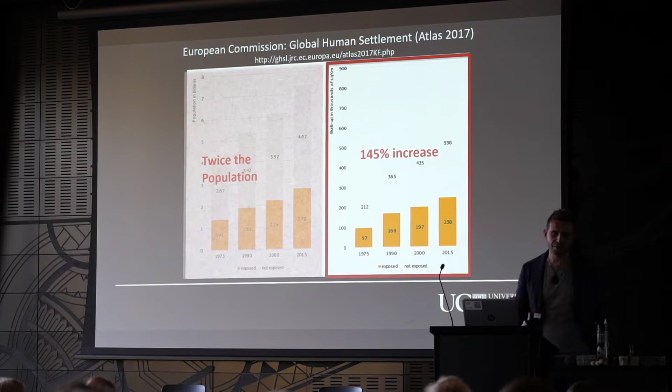Then if we think about the built environment, which goes together with people, same thing — people keep building buildings and bridges in earthquake-prone countries. So in reality, if we like where we live, we think that we cope with earthquakes. We think they may happen, and we don't care. That is really the fact.

But the other important aspect is this: if we think about how the population is actually migrating, nowadays people want to live in mega cities because there are more professional opportunities. And what happened is that now the requirement from society is to build fast. So you can't build a bridge and expect to disrupt several state highways because it's costing billions and billions. Example: Auckland Harbour Bridge. We know what's going on, and this is an example of not sustainable traffic management.

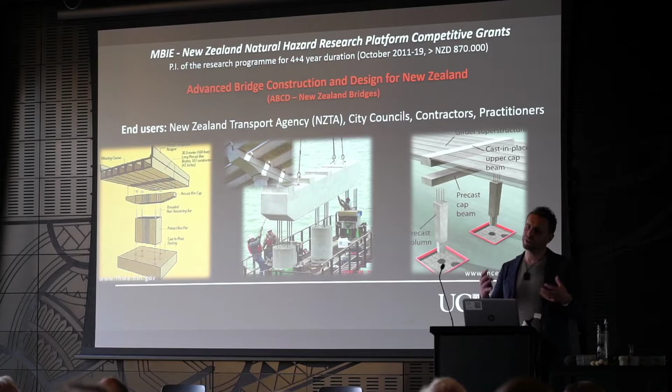So the idea is that what I've been working on the last 10 years is actually working on solutions which are fast to construct, but also resilient. This is a project that's been funded by MBIE, and the idea is that you build up concrete elements—I've done it in buildings more with timber elements. They're all prefabricated and connected together with different reinforcing. In a way, you can build everything very fast, a bridge or a building, and it looks like a big Lego system, where you put everything together.

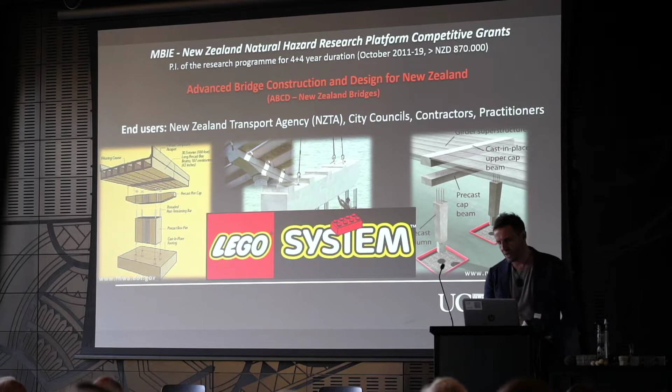Usually when you see something like that, in the thinking of earthquake engineers 20, 30 years ago, oh, you have a Lego system, it's very dangerous. Stay away from a Lego system if you have earthquakes. And what I'm going to do is prove that's actually wrong.

So what I want to do is talk a little bit about the introduction, what we learned from the earthquakes as Geoff was alluding to before, and then I will show some examples of devices that were developed, then we'll talk about the connection and look at the system—the structure. In this case it will be a bridge structure. So: introduction and steel devices.

First of all, when we talk about this—we pretty much live it on our skin—the first question is why we need to change the way we've been designing, why we need structures which are seismic damage resistant. It's a clear example: you've seen what has been happening in Christchurch, the disruption that we had. We need to do something different.

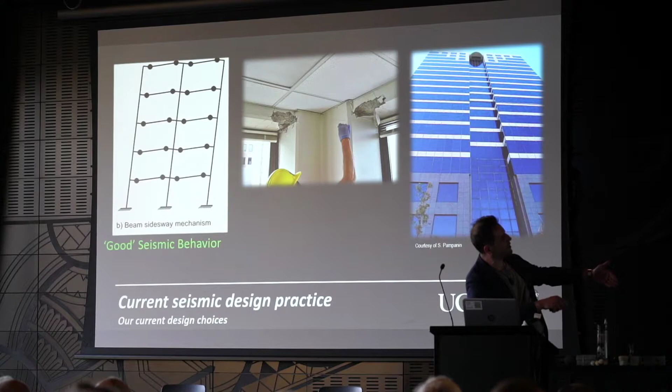If we think about what happened in Christchurch, all those buildings were designed very well, because they're all designed to fail in those parts. Imagine this is the cross-section of a building—these are the beams, these are the columns—they're all designed to damage in a way that dissipates the energy. The concept is the damage in the member is a way to absorb the energy of the earthquake. Obviously, if you look at it from a life safety perspective, fine.

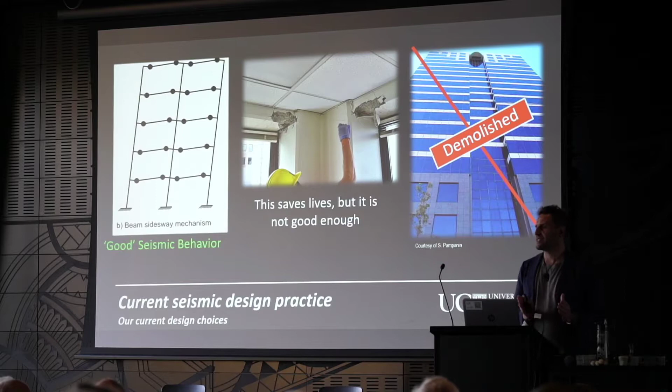But basically, as a result of that, most of those buildings couldn't be fixed. They were too expensive to fix. It was easier to demolish and build something new. And so this is not really sustainable—if we talk about sustainability, this is not sustainable. Imagine all the environmental consequences that we had to basically demolish a city. Where does the waste go, for example—where has it gone?

So I think we need to start changing the way of thinking.

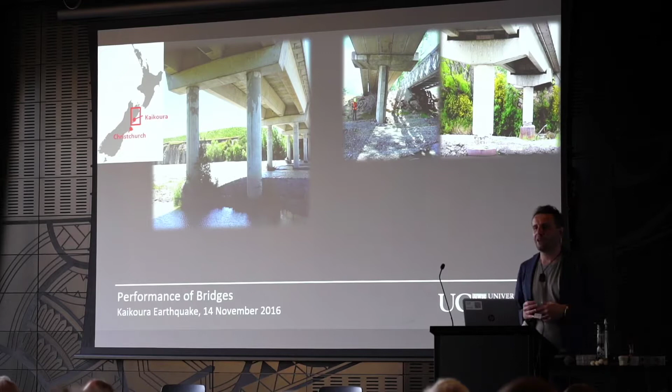Infrastructure was interesting because with the Kaikoura earthquake in 2016, although we haven't got major collapses of bridges, we had a similar performance. Most of those bridges in the Kaikoura area had extensive damage in the columns. The columns are the ones taking the seismic forces—they are the legs. Imagine myself, I'm the bridge: the upper part is basically the mass, the legs are the ones taking all this wind coming from the earthquake. So in the same concept, the columns damage, and the damage absorbs the energy of the earthquake.

But the interesting thing is, this is the new design and this is the old design—the same. So the progress that we've had in the last 40 years has been very minimal, if you compare it with IT or what we've been facing, right? And so that obviously tells me, hey, we need to wake up a little bit, because the way we are designing structures probably should be changed.

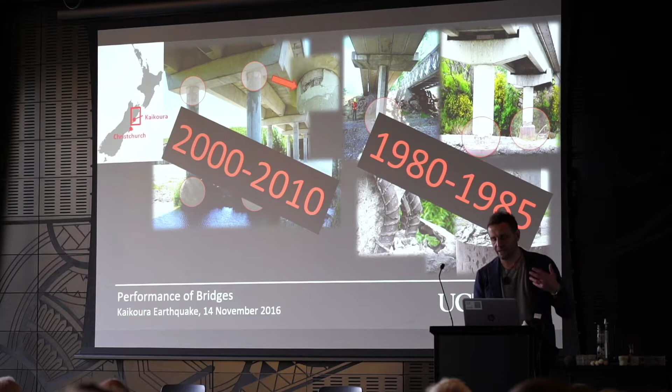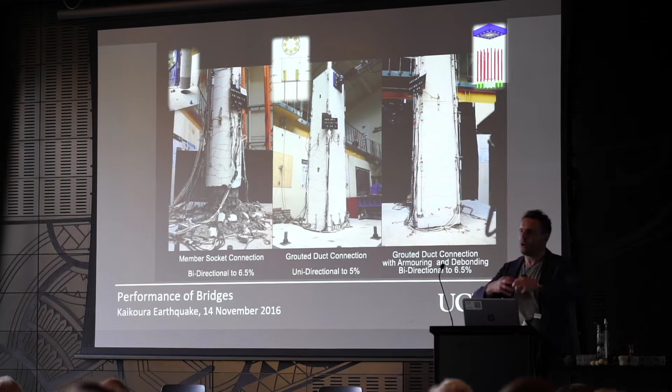And this is an example of columns that have been tested a few years ago. Imagine that this is the earthquake—imagine you could actually be under a bridge, maybe it's not nice, and you have an earthquake, and you see the columns going back and forth, and the intensity keeps increasing. As an outcome, you will see the concrete spalling, the bars will start yielding, going into a plastic domain—and that's what you want, because you want that reinforcing to dissipate the energy.

But then, obviously, if you have something like that, you have also the danger that those columns can have residual displacement and start leaning on one side, like the Pisa Tower - I'm Italian, so I need to sell it, right? But we don't want that, because that is very difficult to fix.

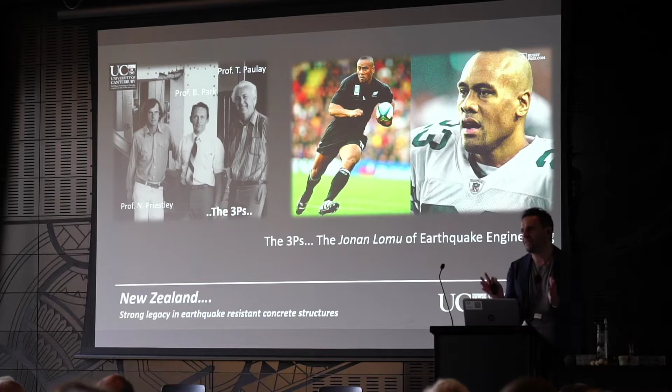So, although we had all this mess, we have been always pioneering earthquake engineering, and these are the 3 Ps: Professor Priestley, Professor Park, Professor Paulay. To me, they are the Jonah Lomu of earthquake engineering, for sure. But the target was always the life safety, and that was the main target. I think they did a pretty decent job on that.

But the thing now we have to start asking is, if we have a structure which is damaged, what is the residual performance? Can the structure take further earthquakes, or do we need to repair it? If we have to repair it, how long will it take, and how extensive will be the repair?

And obviously all those questions, these 3 main questions, are related with business, are related with the functionality. So now we are thinking, if we can guarantee the life safety, we need to be able to design those structures to maintain the functionality, because you don't want to have business disruption.

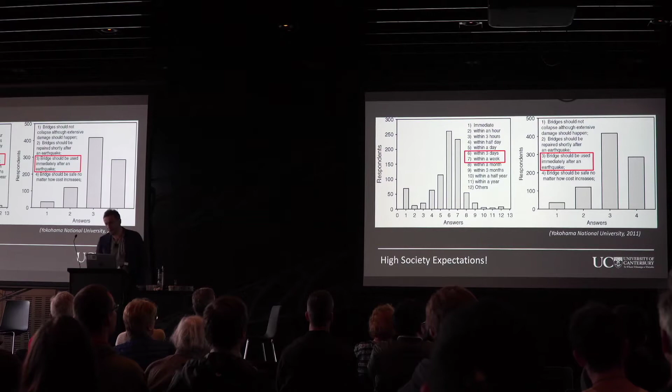This is an interesting survey from Yokohama National University in Japan, where for bridges, the society had very high expectations. They expect that a bridge should be immediately open after an earthquake, and if something needs to be done, it has to be within 1 week, because it's a public structure. Imagine if you have a bridge collapsing, it gives like a sign of vulnerability for the entire network.

I'm selling bridges because I do research on bridges, of course. So bridges are very important.

But now, what do we do? Shall we call our superhero and say, hey, we need to turn all this mess into resilient bridges and structures? I think what we need to do is try to change the way we think, and try to accept the damage, but be able to repair it.

And so when everyone talks about resilience, the definition is simple, right? It's the ability to bounce back after an unexpected event, usually a bad event which affects our lives.

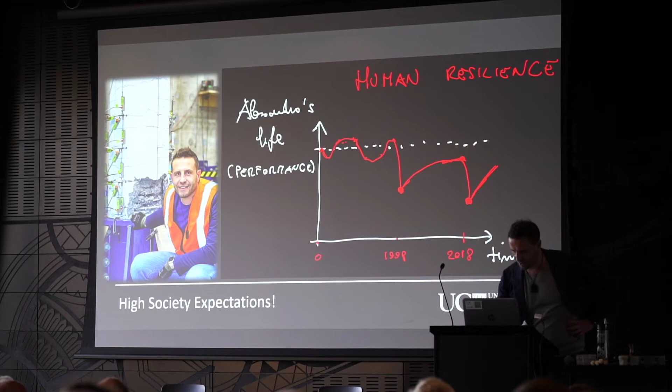We have our performance, which we can measure in terms of professional activities. Let's assume that we run always 100% for our 70, 80 years of life. But what happens when something bad happens to us, we have a loss or something, we drop. And then we say, how resilient is a person? We measure the ability of this person to come back and be functional again. This is my personal human resilience curve, which has been hit quite a lot in 2018 because I lost my mom.

So if we try to go into the engineering side, what we can see here, when we talk about resilience, we have 3 R's. Robustness, which is reduce the probability of failures in any component of the building. Then we have repairability, which is linked with the consequences from failure, so reduce those consequences. And then recovery, so the time - be able to recover very quickly.

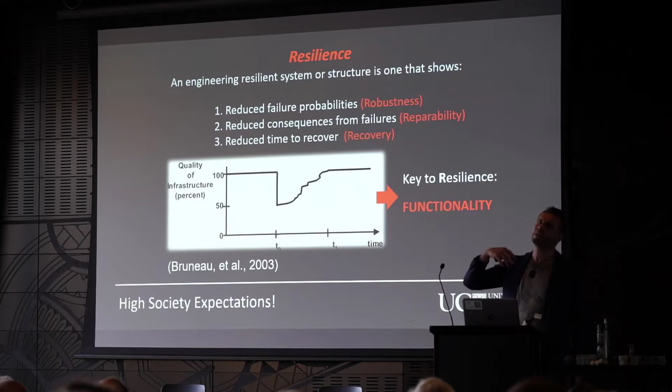So in a way, I like that we are doing this presentation connected with the 2 Geoffs, because the idea is that to increase this resilience curve - if you have an earthquake, a normal structure will be hit down, and then will take some time to go up, and this will be the recovery time to go up to 100%. In reality, if we develop new solutions which are controlling the damage, and then we know how to repair these structures, that curve will become far better.

But then Professor Geoff Chase is going to close up - if we add sensors in the structure, we will instantly be able to say, hey, that structure is fine. And I don't understand why we don't put sensors in our structures. We have an accelerometer in the iPhone, we have 200 sensors in a car. I can't understand why we can't think to have sensors embedded in our structures.

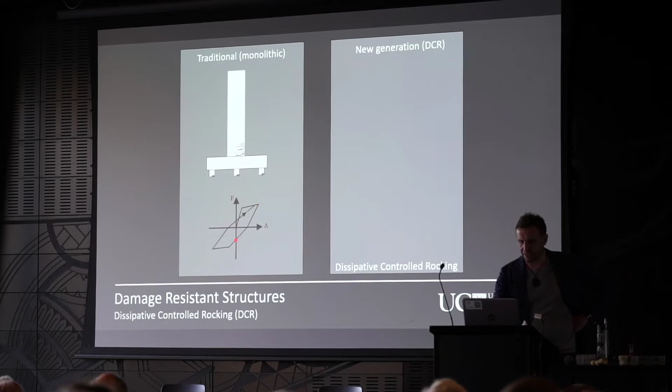The idea of developing these new solutions is that traditionally, imagine an earthquake, you've seen in the columns, you have damage in the member. With those new solutions, we basically don't have any damage in the column, and we have the connection designed in a way that they actually dissipate the energy.

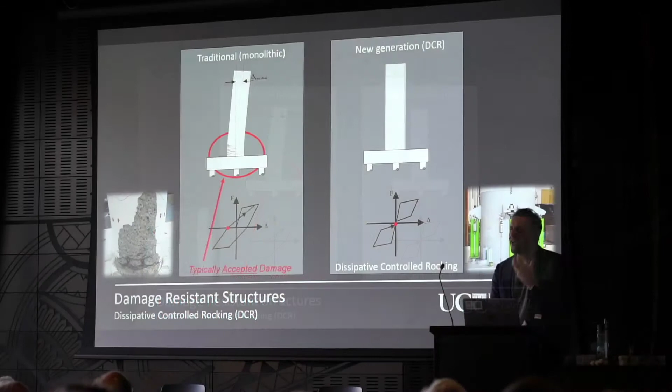What do we have inside to avoid the Pisa Tower effect? We have a rubber band. No, it's not really a rubber band, but high-strength steel, which keeps the structure up in place. If you lose the rubber band, you are in trouble. Boom. You don't want that, right?

So I can, where is Jess? Jess, you need to pass my toys around. So if you want to play with the rubber band, that's an option.

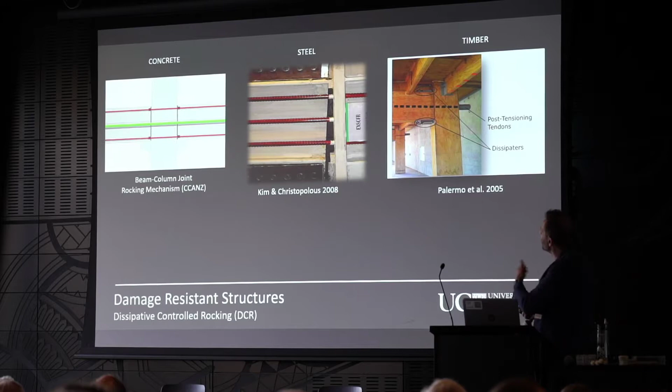The idea is amazing because this simple idea, where you put high-strength bars which recenter the structure, and fuses that dissipate the energy, can be applied to any structure - a building, a bridge - independent of the material. This is concrete, this is steel, and this is timber.

Again, imagine those rubber bands placed, in this case, within the columns, within the beams, and running through. So when you design those elements, those connections, what is important is to control the strain in the materials.

But we can do this very easily, then minimize the potential residual deformation. We don't want to have a Pisa Tower, and we have the rubber bands. And then make sure that we can repair very easily.

So for example, and Jess is going to pass those 3D printed devices around, if these are placed externally, it will be pretty much easy, and knowing that we need 4 or 5, 10, 100, it will be easy to replace it because they're placed externally to the structure.

The key thing, especially for bridges, is making sure that those elements don't actually rust, so we've done research on that side too. Maybe, Jess, if you want to pass those devices, that would be good.

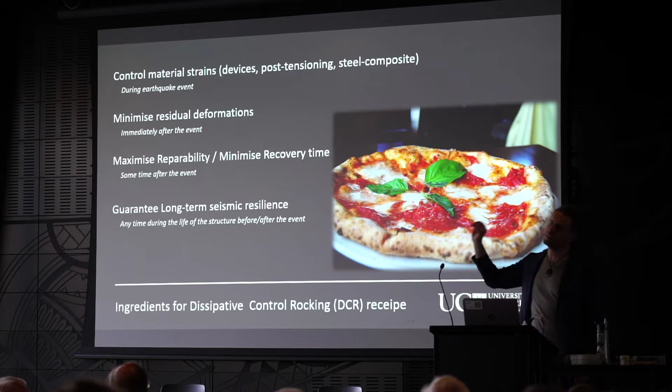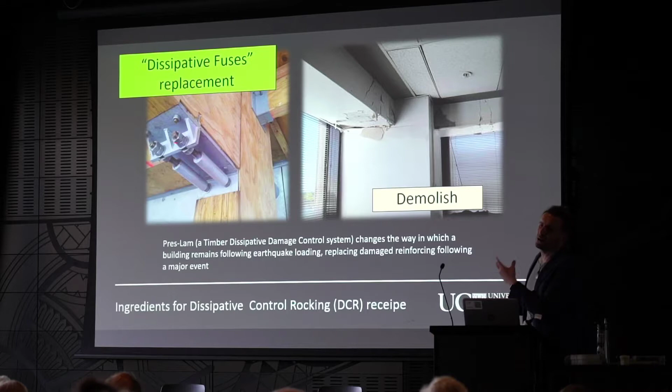Now, what you need to think about - this is an example called the timber Pres-Lam system. This is a beam-column joint, this is the Young Hunter House on Victoria Street, and this is the typical connection. After an earthquake, this is what you expect - you will be in a position to replace those devices if needed. These are the dissipative fuses.

I will just briefly talk about this device, and then Professor Geoff Rodgers is actually going through and spending a lot of time on that. But the idea is that these are simply pieces of steel, and they have a tube outside.

I think Jess has passed the samples around - these are 3D printed samples. The tube is just preventing them from buckling. So the idea is that when these devices go into compression, they don't buckle, okay?

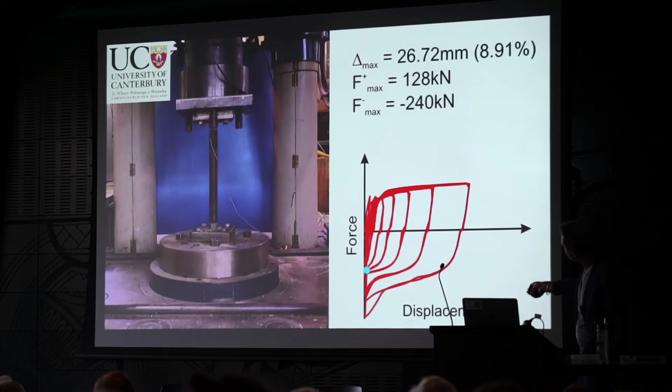The performance of those devices is done in a way that steel is actually elongating a lot, absorbing the energy of the earthquake. The idea is just pulling back and forth, simulating an earthquake. If you have a big area - this is force and this is displacement measured at the top - that means the device is quite capable of absorbing the energy coming from the earthquake.

The application has been extensive, not only on bridges - I'll show you a bridge example - but in timber and concrete buildings. If you're all from Christchurch, if you go to Victoria Street, you can start from Knox Church - you can't really see them, they're hidden at the bottom of the concrete columns. Or if you pretend to buy some expensive Italian furniture at Matisse, you can go inside and find all the detailing of those devices.

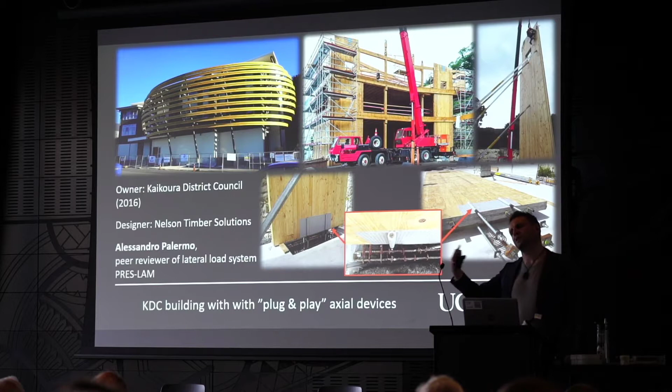We had a few applications, and I want to mention that those devices are also being placed in the Kaikoura District Council in Kaikoura. This building actually went through the Kaikoura earthquake, so it's very close to the design earthquake level, and it was used as a headquarters coordination center during the earthquake. So we had real proof that the building performed extremely well.

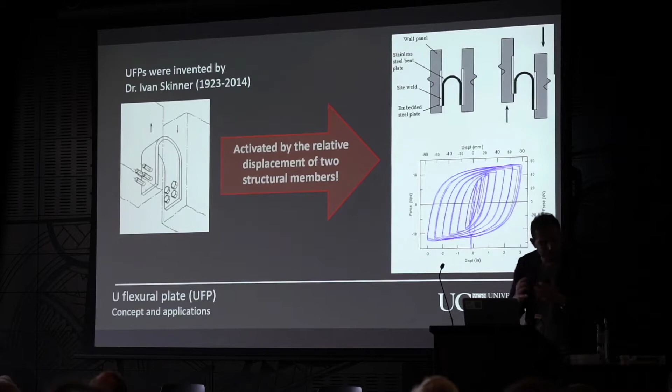I'll run through quickly another device we developed. Not the concept of the plate itself, which was developed by Dr. Ivan Skinner, but the packaging we came up with. The idea is you have this curved steel plate, and when you put two elements, like two walls, moving like this, the steel plate starts rolling, and the rolling movement dissipates the energy. Very clever, because it's just a plate, very cost-effective, and also easy to replace.

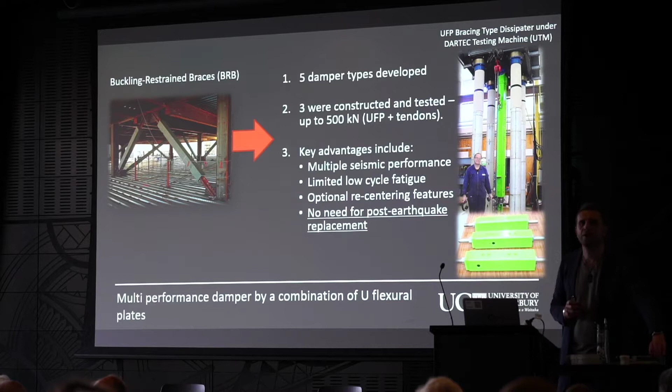I think Jess, where is Jess? I have this small toy that you can pass around. Bridge connection - I need to go a little bit faster.

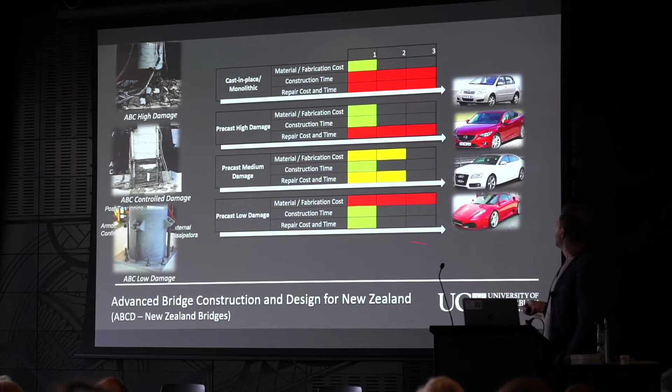With the bridge connection research program, we tested different connections, and to summarize: we tested prefabricated columns, all fast construction, but one has very high damage and this one is low damage. Where you have minimal damage is high performance, like a high-speed Ferrari. Where you have high damage, low speed, a Corolla - great car, by the way, just giving the example.

So the low damage connection is the Ferrari, which is interesting because it's what I was describing before - a solution where you don't damage the column, but only replace the devices.

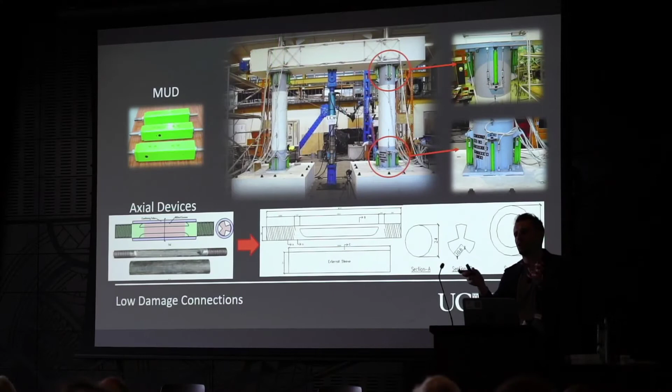We did several tests, starting with a bridge prototype, then testing just the substructure of the bridge, which is the part actually taking the earthquake loads. Imagine this actuator is simulating the weight of the deck and all the bridge girders on top, and this one is simulating the earthquake, pushing back and forth. Inside there is our famous rubber band, high-strength steel.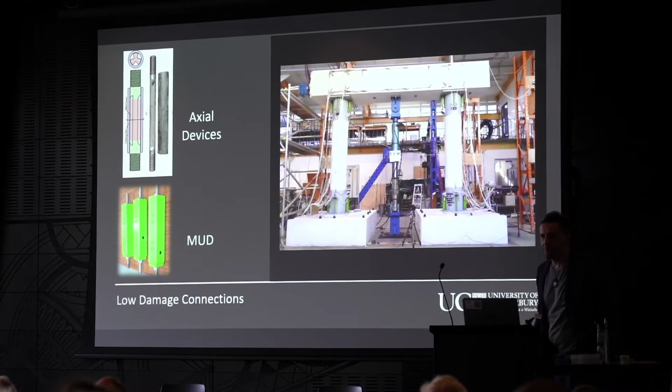These are the devices - one with the U-flexural plate, and this one with the axial bar device. You can see inside there's this bar, which is actually bringing the structure back to its original position. The beauty of this is that after the earthquake, you only have to replace the bar.

So this is the performance again - damage, Toyota; no damage, Ferrari. I'm just selling an Italian brand, sorry.

So we're now moving into system performance. As you can see, we started with the device, moved to the connection, and now we're looking at the system.

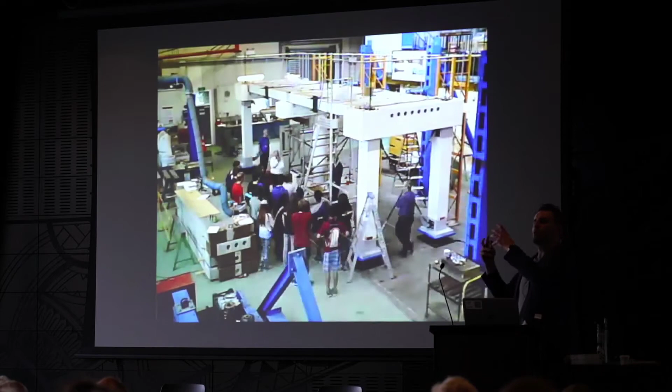We did a lot of testing, and one big test was with the full structure - a two-span bridge. This is simulating the abutment, and we did everything prefabricated. This is just to show you we built and tested a bridge that was built fast but also with resilient solutions.

This research led to an application I want to spend two minutes talking about - this amazing application here in Christchurch: the Wigram Magdala Bridge Link, located not far from the university, opened in 2016. The designers were Opus International, WSP, and I had the pleasure of being involved as an external consultant.

And we have more than 10 labs too, and that created seamless interaction among the three. So when we had the opportunity, they wanted a Ferrari. There was no question, we want a Ferrari.

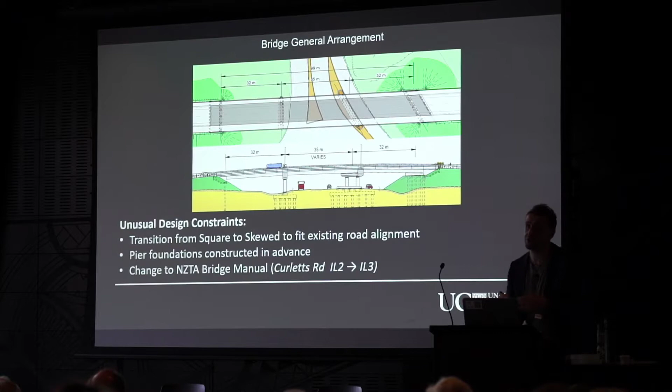Obviously, the bridge has some complexities, and we don't have too much time to go through, but it's a small bridge, almost 100 meters long, with 3 spans. The NZTA, because there was another estimation of the vehicles passing through, wanted to increase the importance level of the structure, which means the forces going into this bridge are going to be higher because it's more important.

As a consequence of that, the idea was to implement the solution I was showing in the testing before into this bridge. Now, let's be honest, it doesn't look like a Ferrari. This is more the engine of a Ferrari, I would say.

Because you can see here, it looks like a conventional bridge, but inside there are the rubber bands, which are unbonded post-tensioning bars, and the devices, which are the fuses dissipating the energy, are embedded in the pier, in the foundation, and in the top of the beam. But they are easy to replace, okay? So the detailing is exposed here.

The bridge already has the foundation built, so they have to build the foundation of the foundation. This is the detailing, and the complexity of the detailing was given mainly because the client didn't want to see the devices exposed. That was a particular request from the client.

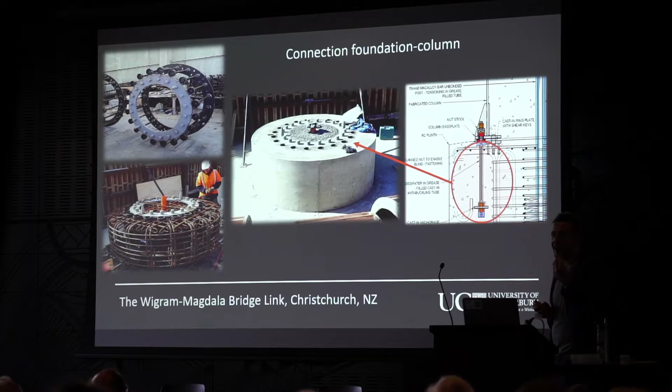While for buildings, the devices are actually an architectural feature that the clients want to see. So these are details of the construction. The column was a steel column that was then filled in with concrete, and these are the devices embedded in the foundation. So these are details of construction.

This is the duct where inside there is the high strength bars, which helps to recenter the structure. And then once they've done the piers, you put the bridge girders on top.

So almost finished. The bridge has been recognized by ACENZ, and also got a commendation from the New Zealand Concrete Society in 2018.

And just recently, we put a research paper to the journal American Society of Civil Engineering, and it's been awarded this Alfred Noble Prize because it was a good paper. But I think the key sell of that paper was actually the final part, which was talking about that bridge, recognized as quite a novel design.

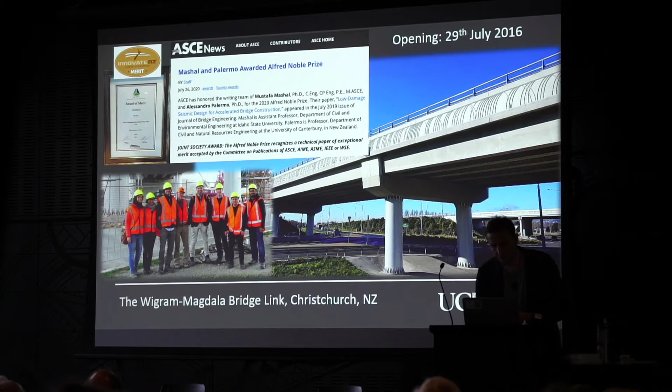It's almost finished. I think you will think, oh wow, that job is done, now we have all the solutions. The thing is, now we have to implement the solutions. And this is like the following step.

It's not easy. And Geoff will tell you about working on this building and other buildings, how difficult it is to implement something new, because everything new is a risk. And everyone wants to stay away from risk.

And I think, to me, yes, we have a lot of those toys in the city, but we should have more. That is clear. But the main thing for bridges is that we need to start thinking a little bit broader, right? We should think that resilience is the new sustainability, from my point of view, especially if you think about bridges.

Because if you use conventional materials, they are going to rust. They are going to have problems of maintenance. An example is the Morandi Bridge in Italy, which collapsed in 2018, mainly due to the problem of poor maintenance.

And so what I'm working on now is using glass bars, and I have one PhD student here working on that, so you can, if you have questions on these, Jess, if you want to pass them around. And these are non-corrosive materials.

And then you should have already received a couple of blocks, concrete blocks. One is ultra high performance concrete, which has a strength similar to steel. And then there's another concrete block which has rubber, and that is waste rubber coming from the tires.

So I think we need to start thinking about incorporating novel materials to improve the sustainability of our infrastructure, and possibly combine that with digital engineering and digital fabrication.

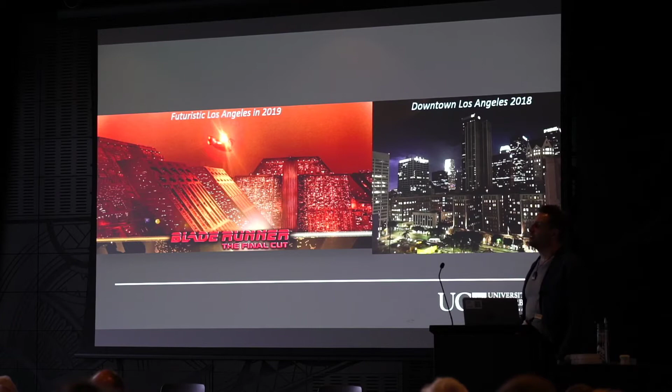And I just close with this slide saying that we really need to make a change. This was me in 2018, Los Angeles Skyline, and this is Blade Runner, one of my favorite movies, the old one, which was projecting the buildings in the future, 2019. So we need to wake up, guys.

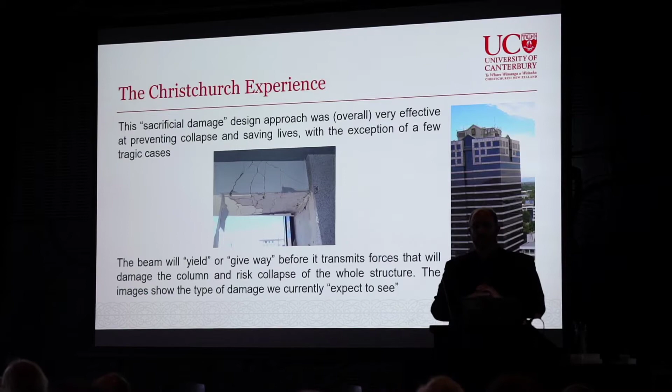Going back to Alessandro's analogy, if you damage my leg, I'm probably going to fall over. If you damage my arm, I'm not going to be happy, but I can remain standing. So that's all about maintaining the integrity of the building, preventing collapse, and saving lives—which, for other than a couple of tragic exceptions, that design approach worked pretty well at saving lives in Christchurch.

The trouble was the demolition which followed. That isn't actually a unique story globally. Obviously, the $40 billion damage bill in Christchurch is something we're all very familiar with. But there were also earthquakes such as Northridge in LA in 1994, with an estimated cost of $40 billion US; Kobe, Japan in '95 with $200 billion US; and Chi-Chi in Taiwan in '99 with $20 billion in damages. So not a globally unique story, what we've seen here in Christchurch.

Essentially, we can't predict when and where an earthquake will occur, and we don't know exactly what that earthquake will be. The one thing we do know is it won't be the same as any earthquake we've seen in history before. But what we do know is that if we look at a lot of earthquakes in aggregate, they do have some broad concepts in common.

Whether it's a near fault or a far fault, whether you're on soft soil or hard rock—all those factors have a significant influence on the way the ground will shake. But there are some broad similarities between earthquakes. This is actually 20 different earthquakes plotted and overlaid. There's significant variability, but there are some similar characteristics.

This is what we refer to as a response plot—essentially the period of the structure and how much it will react. A classic dynamics concept is that if you shake something at its resonant frequency, it will respond with large amplitude. So in any engineering problem, you want to avoid driving something at its resonant frequency.

On one side we have a taller, more flexible structure with a long period, and on the other a shorter, squatter, more rigid structure with a shorter period. That shorter period structure happens to fall into the range where the ground motion has much larger frequency content. So that is actually one of the big design challenges.

If we take a structure that's reasonably flexible, it might sit well to the right on that plot, where the demand is reasonably low. But if we just stiffen it up, we actually move left on that demand curve and increase the demand as we go along.

A classic example of this was actually the design of the South Rangitikei rail bridge, back in the 70s. They essentially did an initial design—this was a tall pier, reasonably flexible. They ultimately found it wasn't strong enough, so they iterated on the design, put more steel and concrete into it, and then found that actually, even though they'd strengthened it, because they'd moved further along the design curve, it was still not sufficient.

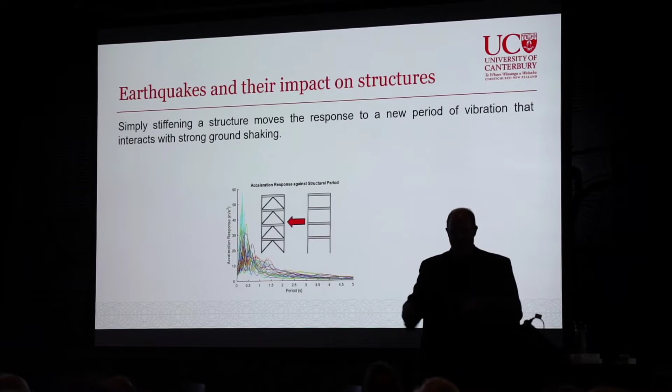So they moved further along and ended up in a sort of iterative design approach, often referred to in the profession as chasing your way up the demand curve. A young engineer named Ivan Skinner overheard this discussion and said, why don't you let it rock? Why have you found yourself in a thought trap where you've started down a path, and actually maybe re-challenge your assumptions.

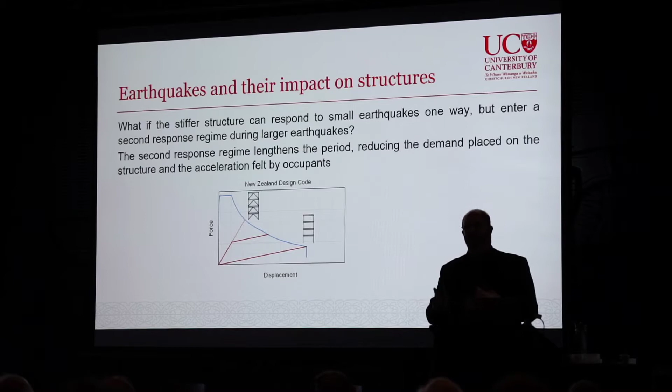So if we plot that differently in terms of a design code, with the more flexible structure on one plot where a radial line represents a period, and the more rigid structure up there with larger demand, the way a traditional building performs is having an initial period when it's elastic and everything behaves as expected under small earthquakes. Then once the demand gets larger, we see the onset of damage occurring in the beams and the softening of the structure.

That damage itself causes lots of problems long term in terms of the need for demolition and repair, but it actually has some really favourable aspects in the way the building interacts with the ground shaking. By the building softening and undergoing that damage, it lengthens in period and moves to a more favourable part of the frequency content within the ground motion.

The key thing is that the transition from one initial period to another has traditionally required this onset of damage, which has the implications you can see out the windows here. So onset of damage is great in that it reduces stiffness, lengthens the period, and reduces the demand. It reduces the accelerations felt by occupants and contents, and absorbs significant energy. The trouble is the building may not recenter at the end of the earthquake, and there'll be significant cost of damage and downtime following it.

So what we would say is, what if we could have the first three without the last two? That really is the underlying premise behind the dissipative rocking connections.

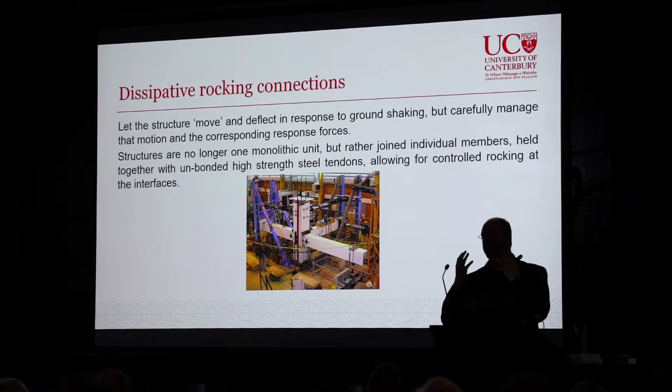Essentially, let the structure move and deflect in response to ground shaking. If you're in a boxing ring, the worst thing you can do is stand up and directly take the punch right in the face. If you can move and deflect with that, you reduce the load that you take.

This is similar to what you've already seen in Alessandro's slides. We're actually talking about a very small amount of rocking here, only on the order of a couple of degrees, but in terms of the duration of different pulses within an earthquake, it's really important in how the building reacts.

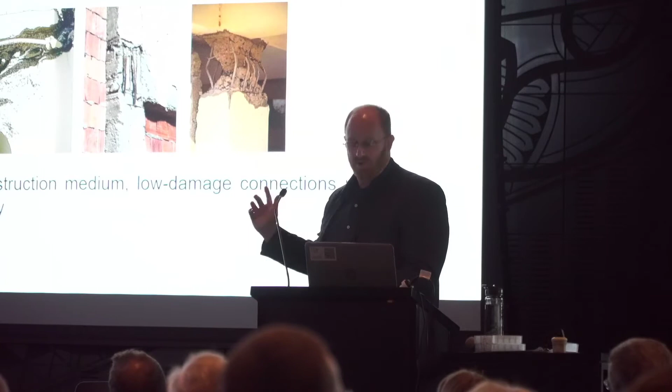The key thing is that if we take away all that damage and destruction, which does absorb a lot of energy, we need to provide something else in its place to control the way the building responds.

There's a whole suite of ways you can approach this, but one is looking at an extrusion damper - specifically a lead extrusion damper. This concept was initially developed in the 70s by Bill Robinson and colleagues at the DSIR, who were also the same people that developed the lead rubber bearing.

The key is that we do this in a reversible way, where either the constriction on the outer tube or the bulge on the central shaft, as there's relative motion between the two, creates a moving orifice forcing lead from one side of the bulge to the other, absorbing a lot of energy through heat.

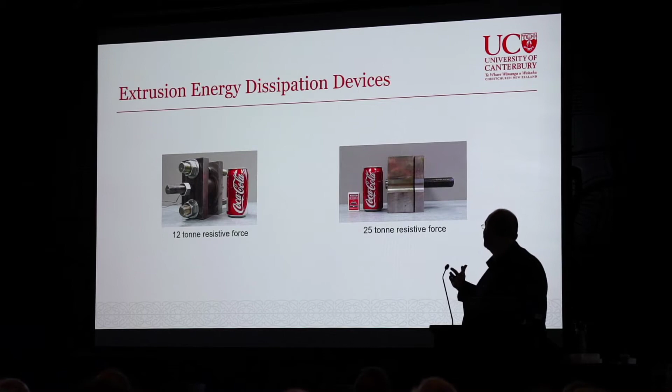So they can be very compact, with 12 to 25 ton resistive forces. Another thing we've looked at, without going into too much detail, is the commercially available viscous dampers for structures - much like the ones that control the motion of the wheels in your car.

Most of the commercially available ones tend to have quite basic damping behaviour, whereas if you look at a high-end mountain bike, or perhaps a Ferrari, if we're going to use Alessandro's analogy, you have much more complicated damping behaviour there.

So there's the compression, the rebound, you have asymmetric behaviour, and you can have different behaviour based on velocity. Some of the work we've done has looked at incorporating those same characteristics to create a more high-performance viscous damper to fit into structures. We can have quadrant-specific behaviour, whether it's going outwards or coming back. There's a whole lot of different aspects that need to be considered.

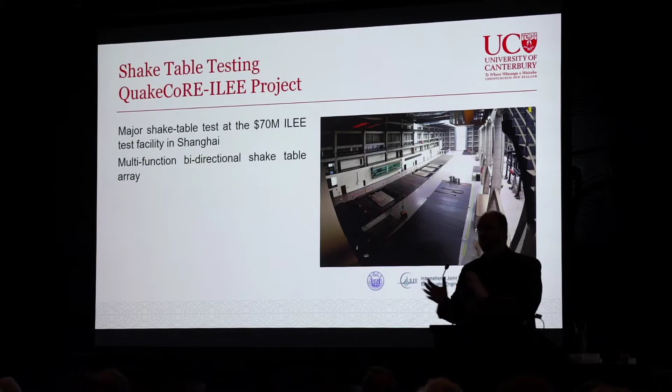So what I'm going to cover here is some shake table testing done at Tongji University in Shanghai, during my Christmas in 2018 into the new year. They have a large shake table array, with 4 individual tables along a long trough, designed to allow model bridge tests, and it can also be used for building tests. In some ways this gives you a real feeling of how insignificant we are as humans when you look at how much energy it takes and how hard it is to recreate shaking on one building.

This is the basement, with a huge range of hydraulic pumps and accumulators. This is one of the plates on one of those pumps: 380 volts, 656 amps at full load current, about 250 kilowatts per pump, around 3 megawatts that this thing draws — about the same as 2,000 houses — just to shake one building, when a fault rupture actually shakes thousands all at once.

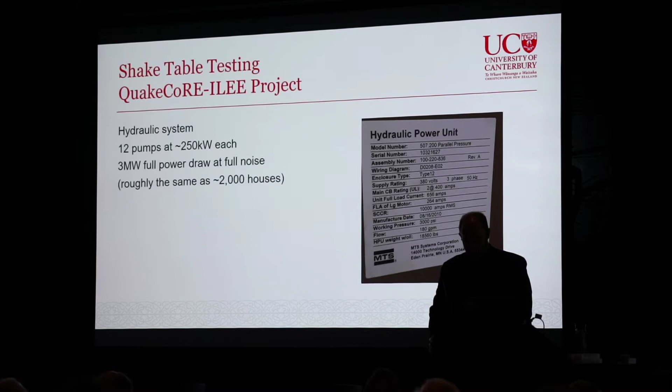So this is one of the buildings here, and you can see a person standing in the control room — that's Ichu Liu, a former postdoc at the University of Auckland who we're collaborating with on this project. This building is about 9 metres tall, with a footprint of 6 by 9 metres, and about 140 tonnes. We used rocking walls as well as some slotted beam column connections that were developed through testing at Canterbury about a decade ago.

We should give you a warning, some of these do sound a lot like the earthquakes you've lived through, and one of my colleagues pointed out that I should warn people that the visceral reaction, the hair standing up on the back of your neck when you hear these loud, can bring back some of the less favourable memories of Christchurch's past.

So this is the same building from another angle, and it is a big shake table. That shake table alone is worth about 30 million New Zealand dollars, so unfortunately it's not something we have the capability of doing onshore here, which is why we end up doing this in Shanghai.

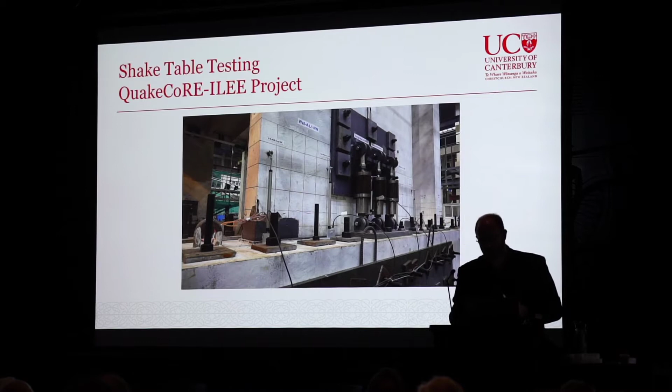As I said, the relative motion is actually pretty small — a reasonably modest uplift — but it has a significant impact on the behaviour of the structure. This is the same thing with some steel fuses, as Alessandro discussed, following a design he'd done a lot of work on previously. It's basically damaging that steel component in that case to provide damping to the building.

The obvious question is that those dampers are actually a pretty small part of the overall structure, so you might ask how much influence do they have on the overall response? For the last test, around the 6th of January, we'd done all the tests we wanted and decided to push some demand into this building to understand its limitations. We took all the energy dissipation off it and just shook it as hard as we could. This was the same ground motion, the same structure you saw a couple of slides ago, but this time without the energy dissipation in it.

I guess you get the idea that was a significantly larger response and it took significantly longer to come to rest. So your life was never at risk had you been in this building, but it wouldn't have been a particularly pleasant experience to be in there.

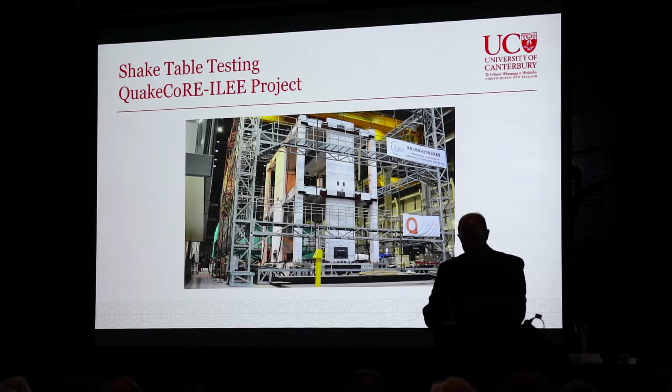So the next thing I want to talk about was Tūranga, the building that we're standing in here. It's a steel frame to carry gravity loads throughout the structure, and then a couple of three reinforced concrete cores that take the majority of the seismic load.

One of the engineers at Lewis Bradford, Tim Shannon, was the principal designer for that, and also Dr. Jamaledin Borzouie. He was a University of Canterbury PhD student, working with Geoff Chase, myself, and his primary supervisor was our colleague Greg MacRae in civil engineering.

And his PhD was actually on low damage column base connections. So like this column here, you can see the white one, where that meets the foundation is actually using a design detail that he spent 4 years testing extensively in the lab to prove that concept, and then got used in this building in addition to several other aspects. So that was an incredibly satisfying thing to be involved in.

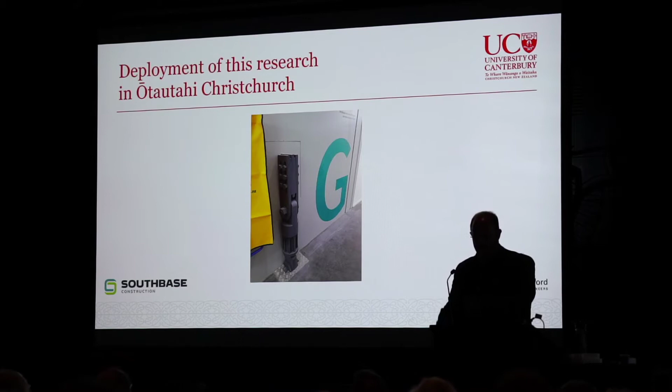The building has won quite a few awards from New Zealand Society for Earthquake Engineering, Structural Engineering Society, Association of Consulting Engineers, and Concrete New Zealand. And also late last year, it was awarded the Extreme Conditions Award by the IStructE, the Institution of Structural Engineers in the UK. It was the only building or structure in the Southern Hemisphere even shortlisted in any other category. So it's quite a significant award, sort of kind of regarded as nominally the world champs of structural engineering, and it's the building that we're in right now. So that's a huge honour for me to have played one small part in that project.

Another project that came about - this was actually talking to a Berkeley-based structural engineer at a hotel reception during a conference in Nara, Japan. He essentially had this problem where he was building a community housing project. This was a place called the Mission Economic Development Agency, MEDA. They essentially built housing in the San Francisco Bay Area, and they had this project in the Mission District, which is sort of south of the city down towards Silicon Valley, and it was looking in the direction of Silicon Valley.

It was looking at basically low-income housing. 25% of the occupants of this building are formerly homeless, and the remaining 75% are those that live sort of below half the median salary for the area. So you had this problem where any non-profit, any charitable organisation that builds community housing has this issue that they can't really spend a whole lot more, because if they did spend more, they could just put that money into additional housing. So immense need and not enough funds to service that need.

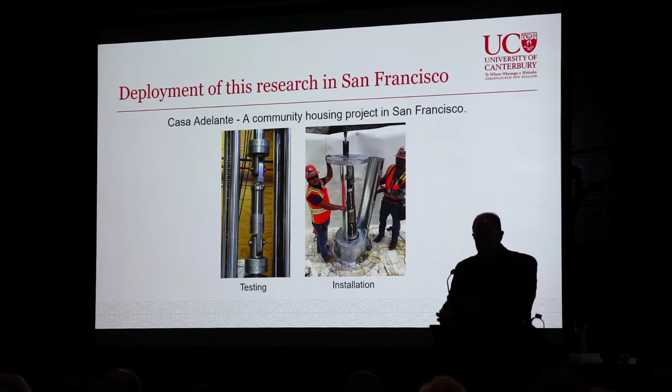So the key thing there is that it did require quite a lot of innovative thinking to try and achieve the resilience without a huge cost premium. A lot of the time when you think about seismic resilience, you might think about a hospital or a server farm or some really high-end infrastructure. But in this case, it was really about trying to compensate for the lack of personal resilience for those that live in this building because of the underprivileged background that they come from.

Realising that if that building was left inoperable or couldn't be occupied post-quake, a lot of those people don't have a good social network around them. They don't have a lot of support. They don't have a lot of personal resilience. And there's a good chance some of them might end up back on the street. So then that actually made the resilience of the building that much more important.

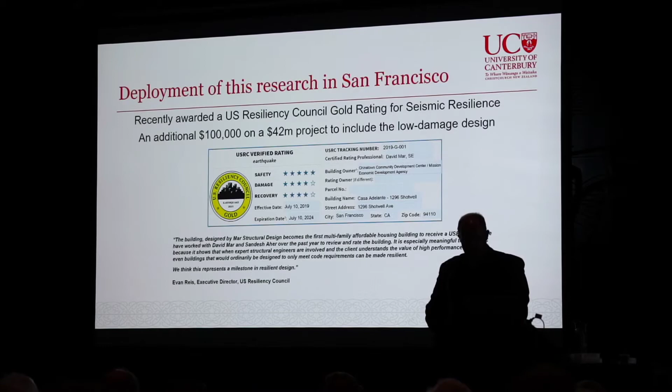So the total premium was about $100,000 on a $42 million build to go with the alternate design. And that was actually awarded a gold rating from the US Resiliency Council for the predicted seismic performance of that building. So quite a significant achievement, and really largely due to a committed range of architects and engineers and everything that worked on that building. So a great project to have been involved with, and I'll just pass across now to Geoff.

All right, so I'm here to talk to you about something perhaps a bit more futuristic. We've heard a lot about monitoring damage or mitigating damage, how to make damage a lot less. We've seen a lot of catastrophic pictures of major damage, and figuring out major damage is always easy.

But first, let's go back in time. So about 34, 35 years ago, I started my career at a place called General Motors doing energy dissipation. Alessandro, you and I will have a conversation about the lack of energy dissipation in Ferraris afterwards.

Not too many years after that, I was sitting 9 floors up at Stanford University studying for pretty much the first test of my master's degree in, believe it or not, structural dynamics and earthquake engineering. And you hear that sound, that running feet sound. What the hell is that? Shortly enough, you find out it's Loma Prieta, a large earthquake that came rattling through.

So we dutifully got out of the building and we were waiting outside, and about 2-3 hours later, it's dark now and all of us are still standing outside. And a truck drives up. It's got the Stanford University logo and there's a couple guys inside. And on the side of the truck, instead of a big outside wing mirror, they've got a spotlight, not a small spotlight, large spotlight, almost the size of a basketball. And he shines it up and down this 12-story building from about 50 meters away. He goes, yeah, that'll do.

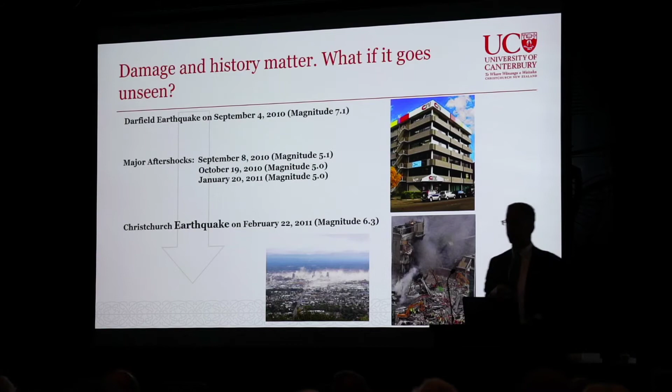So here's a question: a big event rolls through after maybe some prior big events, and you've evacuated the building. Should you go back in and get your stuff? Can you? You left your wallet, your purse, your phone - the center of all modern life. Should you? Is it safe? What if that next aftershock rolls through? How damaged is the building?

These questions matter, and you'd like some precision, and you'd like an answer now. Where and when in the culture I grew up in, there was a phrase - hey, I got a guy. And the answer here is that there are engineers, men and women, who will come out and inspect that structure for you, next week. What do I do now?

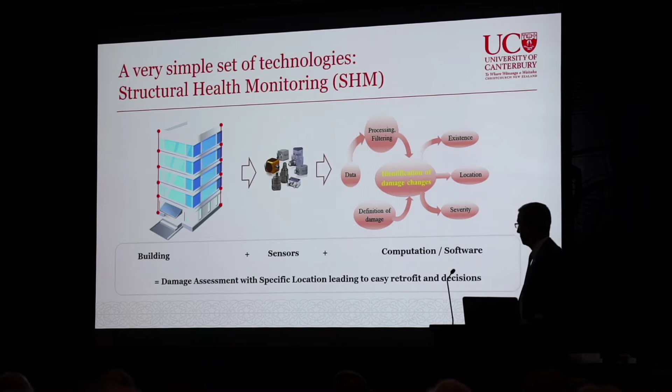So we're going to talk about structural health monitoring, or SHM. It's really a simple set of technologies - simple sensors. You mount them perhaps on every story going up the structure, and you want to do a bit of filtering. You're going to identify damage and changes. You'll have some definition, and out will come: where is it damaged, at least by floor? How much is it damaged? Does damage even exist? So: building plus sensors plus computation and software.

It's a modern business plan. We all pay for subscription services now. I think if I asked who here had Netflix or Spotify or Amazon Music or a range of other systems, I would get pretty close to 100% buy-in.

So there are a lot of limitations in the way it's done typically and today. In particular, the structural health, the damage monitoring comes afterwards - somebody inspects it. Now of course, if it's this damage, it's pretty easy to know not to go back in. But we don't have optimized decision making. We don't have a quantified output. We don't have a number. And in particular, you'd like to know - if I could do the structural health monitoring well, and there's a lot of mathematical research on this - it doesn't get you too far.

What's going to happen next? So great, my building is damaged. If a big aftershock rolls through, will it be a little bit more damaged, a little bit less damaged? How stiff is the building? So Alessandro's toys are still circulating through the room. You want the building to be stiff enough so that it can move and absorb energy either through devices or through absorbing energy in the beams, but not too stiff. Otherwise, you're shaking a carton of eggs. All right, and so bad things happen either way.

Equally, when it moves and you have that damage, how much? In the cases and pictures we see catastrophically, it's always huge - it's an easy answer. But most of the time, you can't see it. And you'd like to know, what is the future damage or collapse capacity? What is my risk of collapse? Should people come back into the building now, next week, after repair, never? What are those answers?

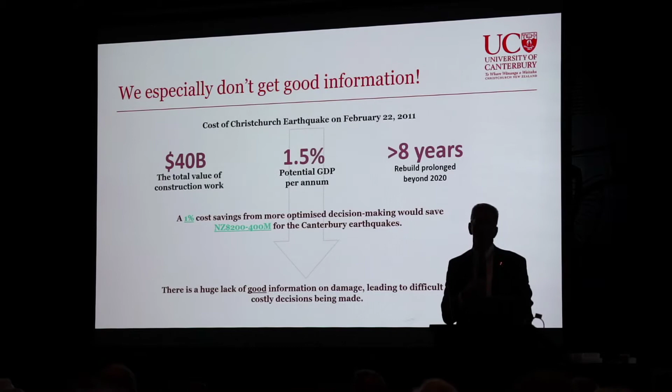So it's important to have resilience. I think we all knew that, but there we go. A 1% cost savings on that, or less, is 200 to 400 million back into the economy. Just 1%, which is a nothingness if you have good information.

You look at businesses today, modern businesses are very much about information services, and they're making a heck of a lot more money than, or saving people a heck of a lot more than the 1%, and making more than that. So there's a huge lack of good information, and this talk is entirely about how to use some very cheap sensors and a bit of mathemagic and turn that into very good information.

So what if there's the old sort of SHM, people are sort of good at analyzing things after the fact, often with a human in the loop, and I won't talk about the methods or the math today. That kind of gets you up to where we are, and you can create damage indices based on the amount of motion. But then, as I said, what happens when I go forward to the future?

And particularly a predictive digital twin models. Digital twins is a hot word, I would call it a virtual building model. But if you listen to the commercialization people, Gartner's is a major firm that surveys technology trends, the last 2 years digital twins and what they call hyperautomation are the number one trend.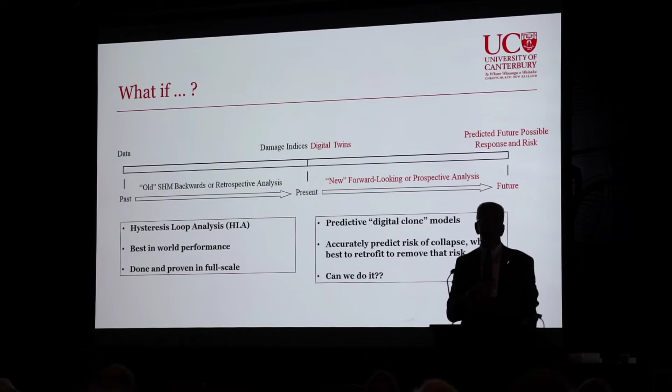By 2025, this is a $100 billion a year business. It is already a $20 or $30 billion a year business. By 2030, it is $350 billion a year globally.

Many of us will perhaps remember that a number of years ago, a Malaysian Airlines plane went off track and was found, or pieces of it were found, that probably crashed somewhere in the Indian Ocean for reasons still unknown. But that was way far away from where anybody would have ever guessed. And here's how they found out.

General Electric, who own Pratt Whitney, an engine maker, they make digital clones of their engines so you can optimize the life cycle of the engine on that plane, which is a massive investment for you as an aircraft and an airline company. And that is sending data back in bursts to satellites, even if, like Malaysian Air, you hadn't bought that service, it's still sending it in bursts. It was from those satellite bursts, and which satellites, they're able to say, well actually you're looking over here, but actually maybe it's way over there. And that led to that change.

Digital clones, it's big business, will be much, much bigger business. So this is our vision of the future, and the idea is that you have real-world conditions, data feedbacks, and computation. You make a digital clone of the building. You can monitor that. You have smart connected products and services.

Predictive operations, alert, advise. Do you need retrofit? Is your building responding unexpectedly? What is the risk? What is the number? Give me a number. There's a 20% risk this will collapse if you have an earthquake aftershock over 5. Unacceptable. All right, we're going to put numbers to these kinds of things. We're going to show you how we do it and that we have that capability. This is really the boring version.

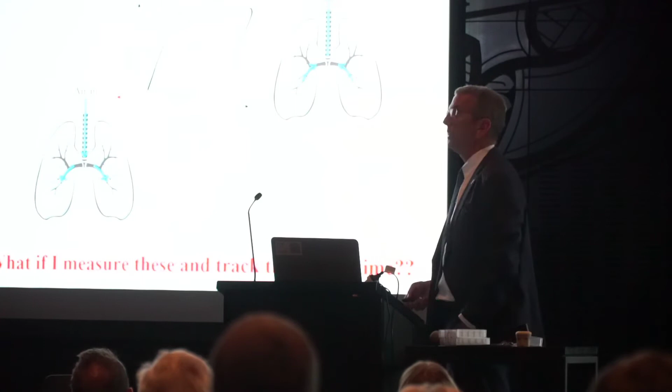So what if I measure these using simple sensors and a bit of knowledge about the mass of the structure, and I know the ground's motion because I'm measuring as it happens, and what if I track them over time?

What happens? So most buildings, you'd like to remain linear, you have sort of this. Concrete buildings, in these big examples you saw here, they have pinching and degrading. So actually the concrete cracks, Alessandro had many pictures where the base of the bridge pier, all the concrete spalled away to the steel. So it actually starts out, your stiffness almost disappears until you start compressing more concrete again, and then the stiffness goes up, but it's still much lower than before. So it starts out with a steep slope, and it just falls off.

So we can just track that. We monitor these. We use a simple statistical algorithm to fit some basic lines to it, and we can monitor every element - elastic, inelastic, and any other element of stiffness - so we can track it over time, even if it's degrading and that overall stiffness of that loop is just falling over. It's as simple as that. No advanced math, no advanced professor really required, although I was totally necessary myself.

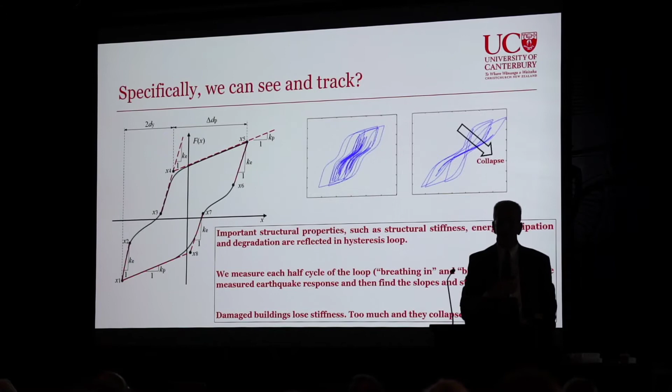So, does it work? I mean, that's finally the bottom line. Does it work? I can sit here and talk all day, and I'm a distinguished professor, not just any professor, so of course it works.

Maybe. Anyway, this is E-defense. So Alessandro showed us a big shake table, Geoff showed us a bigger shake table. Got the biggest shake table. All right, so this is E-defense.

You can shake. This is 2, 3-story sort of standardized apartment structures being tested in Japan. It cost $250,000 just to warm up the hydraulics on this, I'm told, anyway. I was really fortunate that we had some Japanese collaborators who thought it was worthwhile to pay for this.

So you have, in the Y and the X directions, you have various sized earthquakes. A peak ground acceleration, 0.11 is pretty small, 0.62 is pretty bloody large. So, we'll look at some of these. There's 6 of them, these are the sort of 2 biggest ones there. Does it work in the X and the Y direction? It also shakes vertically. So here's the X direction.

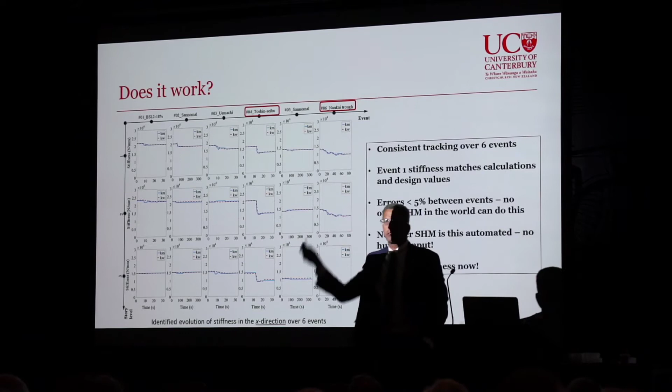So you have your first three stories, story 3, story 2, story 1. I agree it should go story 1, story 2, story 3, but this is the way we do things in structural engineering. We know it's backwards, but we like it that way.

In the first event, it's pretty small. There's a little bit of a drop in stiffness. Slightly more in the second one, like another small aftershock, slightly more. There's the first big one, and it's massive, particularly in the second story. It's lost almost half its stiffness. And then the last one. The dashed lines are the modeling and the prediction.

This is a nicely constructed test structure, instrumented everywhere. Does it work? Part 2, this is the other direction, and yes, it does. The big thing to see is that between every event, it ends here, starts here, ends here, starts at almost the same place, same thing, right? That level of continuity has not been demonstrated by any SHM algorithm anywhere in the world at any time to this date.

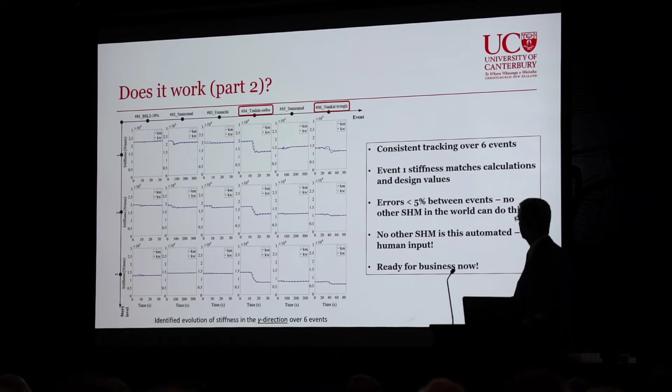So with just loss of stiffness, you can do rapid damage tests. If you lost 0 to 10%, you can go right back in. 10 to 20%, maybe, but we should inspect and patch it. 20 to 40, moderate damage. 40 to 70, major damage. Come back, that, number 4, Toshin Seibu, that's major damage. You're not going back in that. And over 70, somewhere in there is collapse or a huge risk of collapse. So it's real time. I can give you that answer within 10 seconds after an earthquake.

But how can I predict from this result? I know what happened. How do I go from what happened to what's coming next?

First, a little aside. This is the BNZ building near the waterfront in Wellington. It was only built in 2009-10, I believe. It had sensors in it, 15, courtesy of GNS. And it went through 3 events over the course of several years: a Seddon earthquake in 2013, Lake Grassmere, smaller, in 2013 as well, not too far afterwards, 3 weeks, 4 weeks later. And Kaikoura, which we all remember down here, a sort of big rolling event, which was a little bit bigger up there, although that's 7.8 magnitude at the epicenter.

So it's monitored quite heavily. And we've talked about cost here. Geoff has pointed out that it's 0.2, 0.3, 0.4% of building cost to put in devices. Pretty similar for Alessandro's work. We're looking here at 0.1% or less.

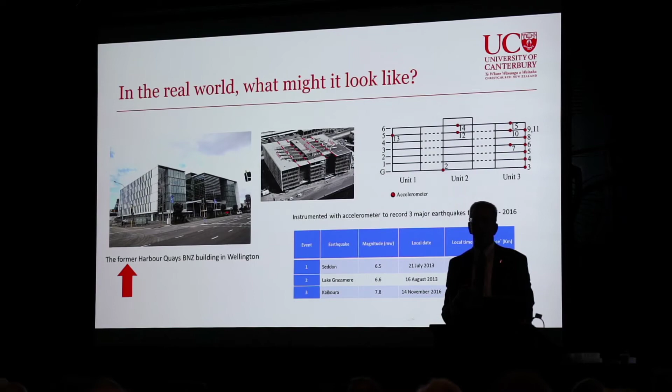So what if I said to you, you could have all of their stuff and my stuff for 0.4%, 0.5% of building cost? For the average sort of Christchurch house, where I'm going to round that down to $500,000, you'd be looking at, what, $2,000, $2,500? You ask people, what would you pay to have this be, you know, really earthquake-proof, really safe? And the answer is, you know, a heck of a lot more than that. And then when it comes time to buy it, they all sort of walk away, as Geoff and Alessandro have mentioned too. Oh, it's pretty expensive. I don't know. So there's my bit of argument for today.

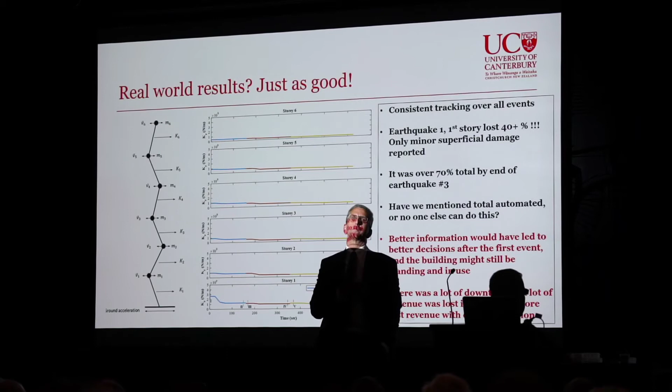And if you think about it, stiffness works like standing on the floor, right? So, you know, we've seen this example. I sway back and forth. If you bust up my ribs a little bit, I lose a little bit of stiffness up here, right? But it's the stiffness from the knees down, the first story, that keeps me rooted to the ground and standing up straight.

So, better information. After the first event, the reports anyway, we haven't seen the detailed damage reports. The reports were, well, cosmetic damage, minor patching, and they went out of the building though for several months. The second event, there was no one in the building actually at the time. Oh, same thing, minor cosmetic stuff. The third event, 70% loss of stiffness. They had concrete spall. I said, oh, we're going to have to demolish it. And even then, it was kind of disputed and fought between engineering experts, and lawyers got wealthy.

So you can see some big damage, and then further relatively big damage. You're well into that 40 to 70% range. The reduction here is 53% in this direction.

Here's a hysteresis loop, and you can see it starts out almost vertical, just buried in there. Pretty quickly, the loops get wider. Further and further, and you can see the overall slope after the damage is lower than it is there. As that slope falls over, the building falls over, is the way to think about that.

You're well into rebuild-and-demolish territory, which is finally what happened to a 10-year-old-ish building. So how do I turn that into a prediction going forward? I can take this guy here, the physical building, and start to do structural health monitoring. I can turn measured data into ones and zeros, and hopefully turn that into a predictive, fully fledged model, a digital clone of the original, able to predict what would happen next.

So I take these SHM results, add them to machine learning and simulation, and come up with a nonlinear model that I feel will best predict, without going into what's under the hood, what will happen next.

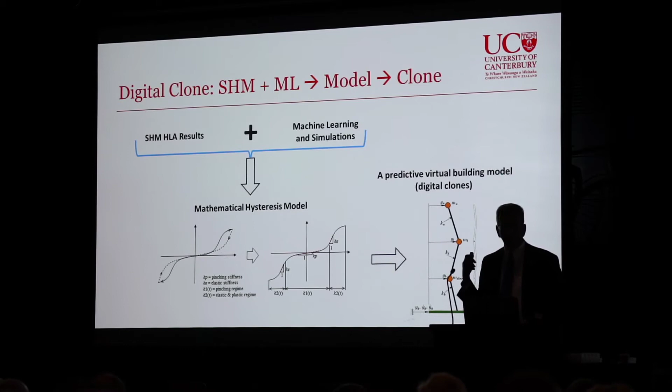Again, does it work? We'll go back to our friends in Japan. I will do the SHM on this event where we had that major damage, and predict forward to this relatively small event and then to this really large event. I'll simulate them and see: did I get exactly what they got on the shake table? Proof is in the pudding, money where the mouth is, all those words.

And here we go. So here's the first event, and there is what I would re-simulate for that. You can see the blue lines are the measured data, the red are the actual model. It's pretty close, still pretty close here. We mostly care about the relatively large motions, the peak motions. The small stuff isn't of major concern.

And then a large event, two events later—that could be an aftershock, 40 minutes to 3 hours after. Again, I'm predicting quite well, if slightly conservatively, the peak values. I can know the amount of extra damage. I can capture that stiffness loss, because those peak values, that good match, come from capturing that future stiffness loss, the one I didn't know about yet. I didn't pre-guess, I didn't pre-model. If I can know that the next 20% of original stiffness loss is coming, and capture that, I would get this exactly so, including the loss of frequency as the period increases.

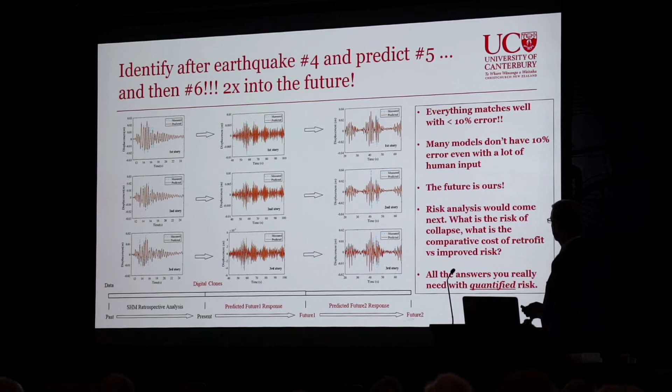So that's a digital clone. From that, I can predict the likelihood of collapse for that structure using well-known computational methods. It might take an extra 10 to 20 minutes at most, depending on how good the software you want to run is. That's a digital service—it's that simple.

So you could then take this and say, if I'm watching this building, I know the other similar buildings around it. I can probably tell you, not with the same accuracy, but I can tell you their status. We call that wide area structural health monitoring. You could start monitoring with selected canary buildings—every second, third, fifth, whatever the number might be. It's low cost, 0.1% of building cost or less. You could start monitoring what was going on, and have a very good idea of what had happened in that city.

Much better information leads to much better decisions, leads to much more rapid decisions, leads to more rapid and more optimal dispersion of resources. To rebuild leads to far faster recovery of the city and economic recovery overall.

Why is this necessary if we have these great devices? Because, well, in this city it's a bit hard, but in most cities, the buildings that will be here 40 years from now are 80% of the ones here right now. As we rebuild this city, it will take time to see that changeover.

So a brief pause for some reflection and some thoughts. I'll talk about a digital clone in the future and try to link it all together from what we've seen. We have the future of buildings, our future of SHM. The problem: engineering input is often not available for days, weeks, months, and it may be highly variable in content. How stressed is your engineer? What if I had an automated algorithm? I don't need a guy.

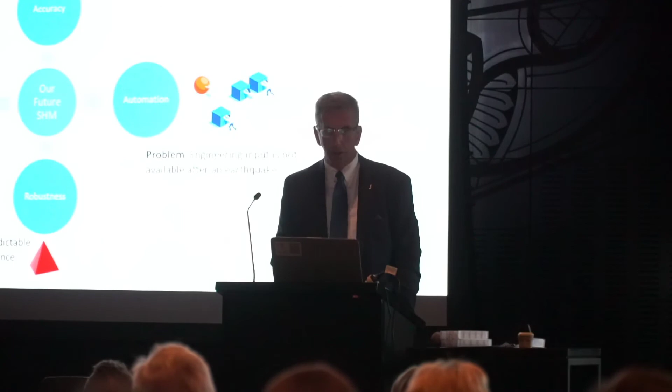Then there's the problem that earthquake input is unpredictable. Seismic response, as we've heard, and the seismic input itself is highly variable, but the methods are robust to all kinds of earthquakes. Once you enter that prediction phase, I can simulate a wide range, as Geoff Rodgers showed you, all sorts of earthquakes. We don't know which one or what type is coming next, but we can look at all of them. It's just computer time, just a little bit of electrons and hardly any power. So that's the digital clone future.

I'd point out this is a large earthquake-prone city. We'll be voting about some people that are just off to the left side of this picture in the coming weeks. I urge everyone to vote as well. And we don't have much in the way of buildings with advanced devices or with advanced monitoring of any form.